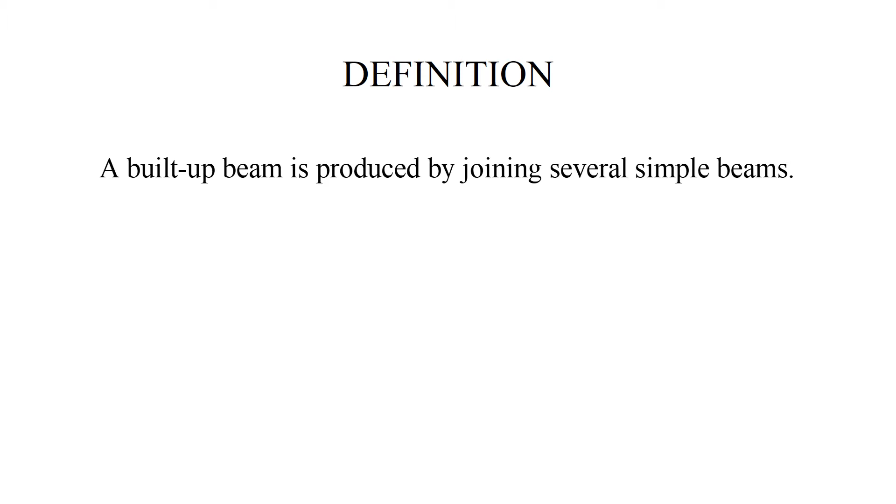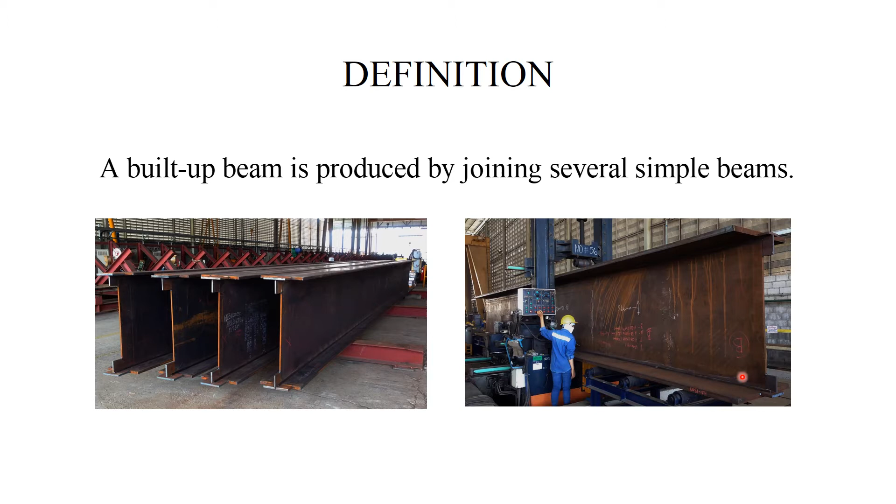I can assure you that this is a built-up beam rather than a monolithic I-beam if you look at this photograph. Clearly, these are huge I-beams for very large structures, and obviously they have to be custom made where metal plates are welded together to form an I-beam, and the key is to examine welds at the base and at the top of the beams.

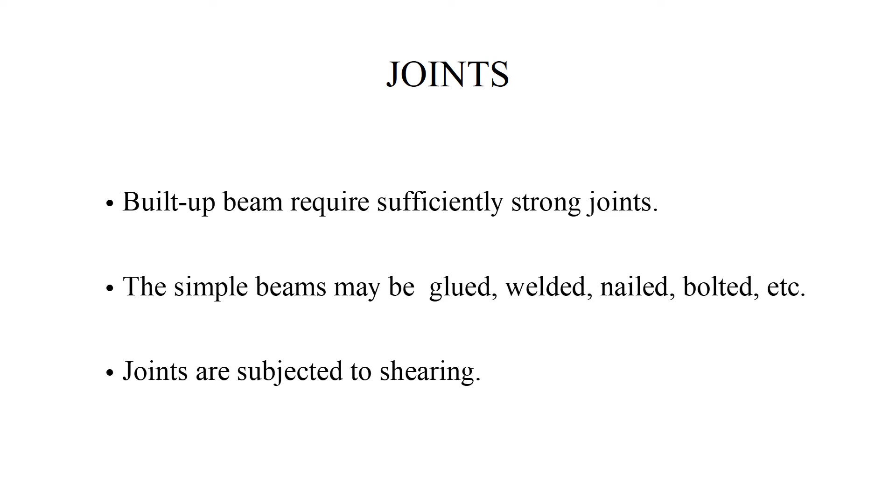So joints in built-up beams must be sufficiently strong. We certainly do not want the weld or any other joint to undermine the basic loading capacity of a beam. The beams could be formed by gluing, welding, nailing, bolting, etc. And the key feature of stress analysis is that all joints are subjected to shearing.

So when we analyze joints, we recognize that shearing of joints has similar features to shearing of simple beams, or stress analysis of joints must be related to shear stress analysis of simple beams. Also, as far as analysis is concerned, all joints can be divided into 3 groups. Point joints, like nails, bolts, screws, line joints, like welds, and area joints, like glue.

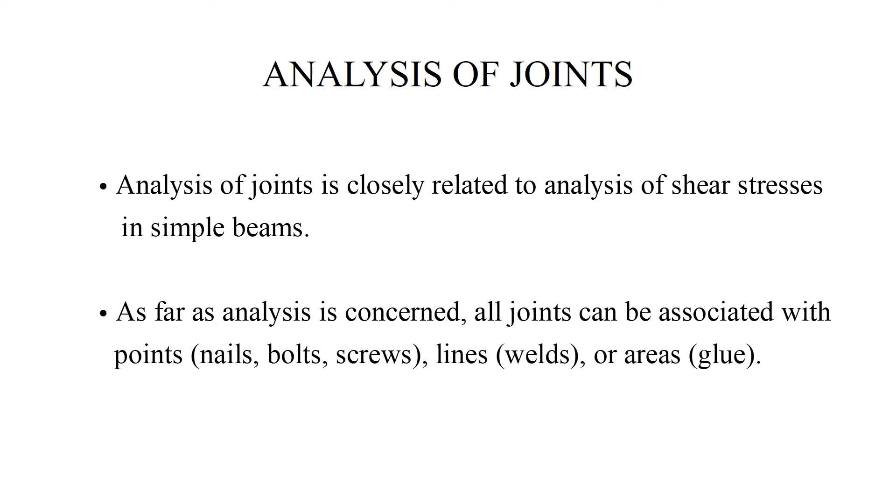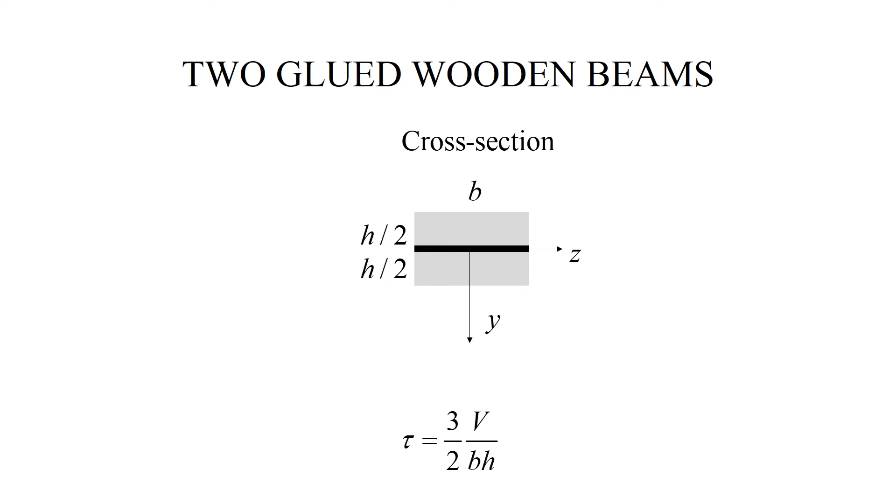Now I would like to go back and see how we arrived at this expression so that we can see how we can extend our approach to shear stress analysis in simple beams to analysis of joints. So let me redraw the cross-section of the beam, but now I would like to identify the lower beam as the free body of interest, and of course this free body is produced by cutting through the glue along the plane XZ, or along the horizontal plane of the beam.

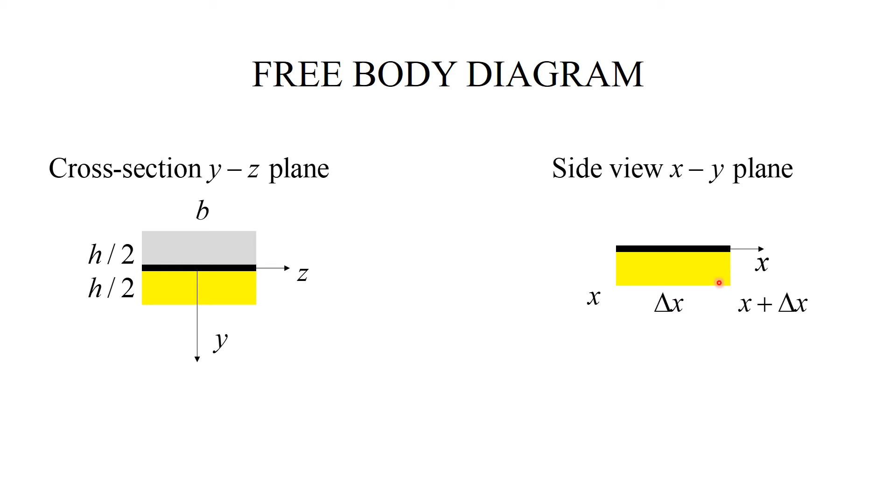I would also like to have a side view. So this is YZ plane, this is XY plane. So in this figure, this is the cross section with coordinate x, this is x plus delta x, and of course this is an elementary beam element of length delta x. So if I consider this element, I can show stresses acting on this element.

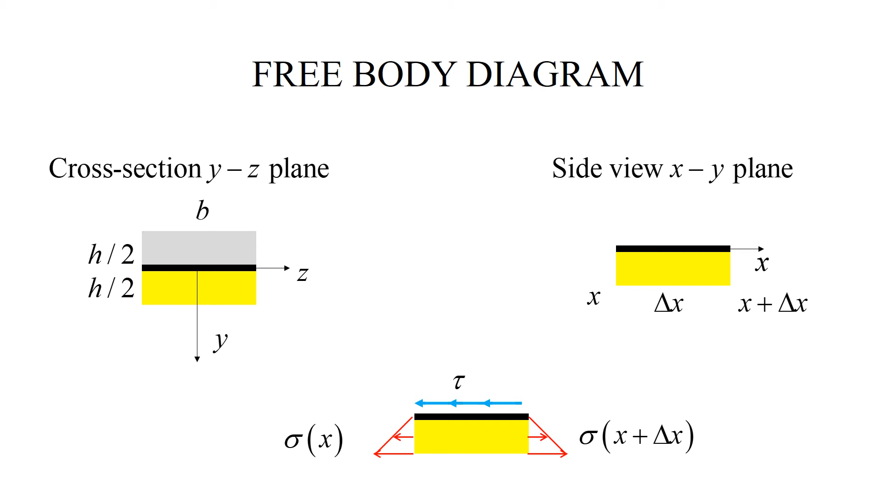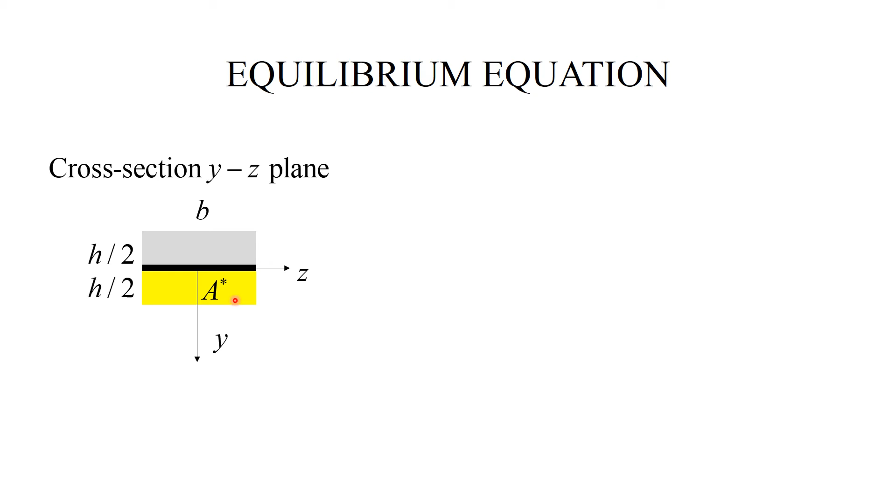To this end, let us redraw the cross section. And now I identify the yellow part of the cross section by A star. So that's the area below the cut. That's a familiar A star we've been using all along. And now I will take the stress diagram developed at the previous slide, and I will use it to write down force equilibrium equations.

Actually, I need only one equation, sum of the forces on x. It has three terms. The first term is the resultant of the distributed forces, or the resultant of sigma x, and sigma x is distributed over the area A star, and therefore here we have A star. The second integral is the same, but for the normal stresses operating on this plane, so it's still the same A star, but now the stresses refer to this section rather than to this one.

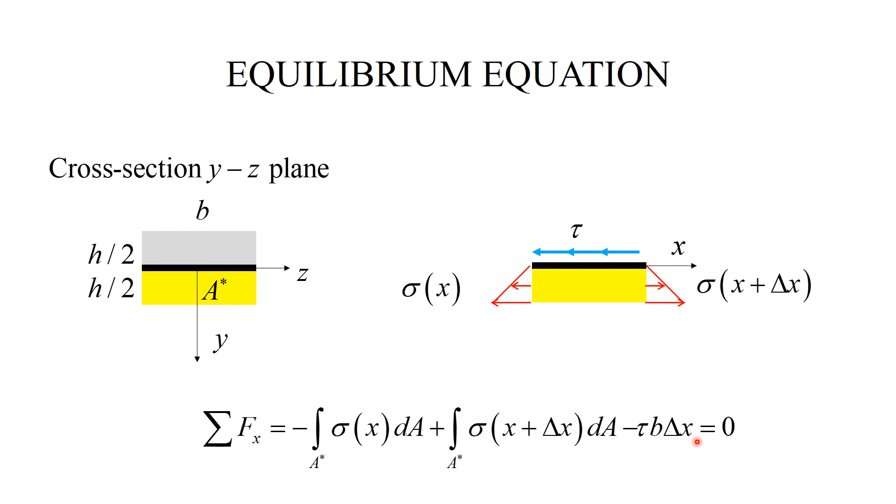And finally, I calculate the force induced by tau by multiplying tau by the area. This area on this side is delta x. On this side, it's b. So the area is b times delta x, and that's the equation.

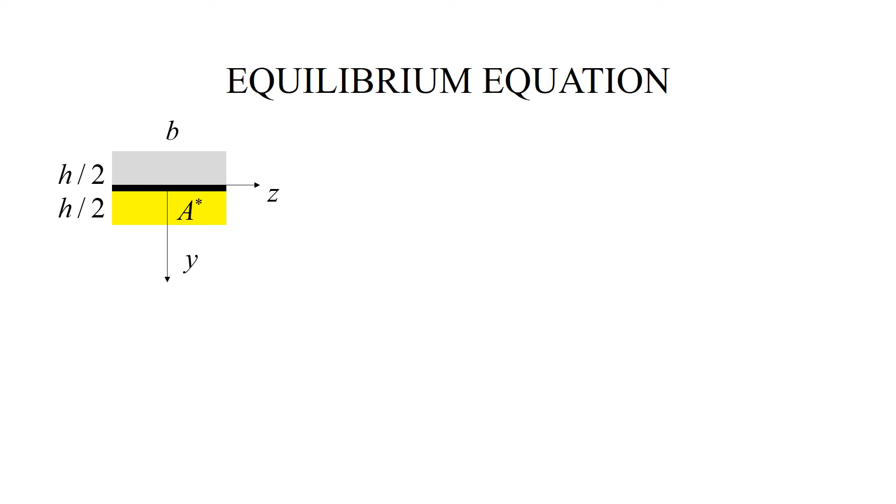It is useful to rewrite this equation using another view. So first, let me copy the cross section. And now, instead of showing the view in the xy plane or the side view, I will show a three-dimensional view. Okay. So on this element, x-axis is perpendicular to the plane. This face is exactly this face.

This tau operates on the plane covered with the glue. And here, instead of showing the normal stress distribution, I show the resultants induced by the stress sigma of x and the stress sigma of x plus delta x. Of course, this is another view of the free body diagram, and the equilibrium equation does not change. Maybe it just simply helps you to understand where different terms are coming from.

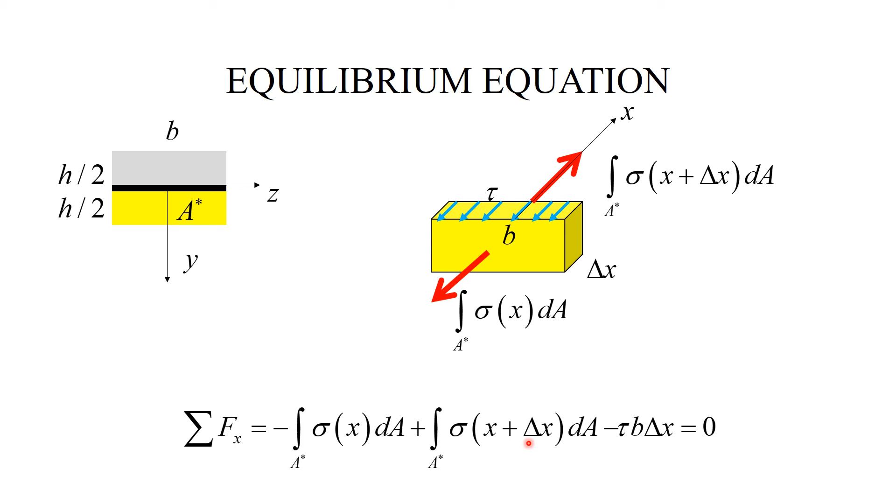Let me continue with the equilibrium equation, and first I'll rewrite what I had on the previous slide. And now I also recall that sigma is equal to My over Iz. So now I can put these two guys together, and I modify the first two terms in this equation. The last term remains the same. All I did, I substituted this expression into the integrals, and therefore this form transforms into this one.

Now I can collect the terms and observe that as far as the area integration is concerned, Iz is a constant and M's do not depend on the coordinates within the cross section. They depend only on x. Therefore, M's and Iz can be taken out and we can rearrange this equation in this form. Please take your time to see how things are done, but now this is the form that allows us to arrive at this equation.